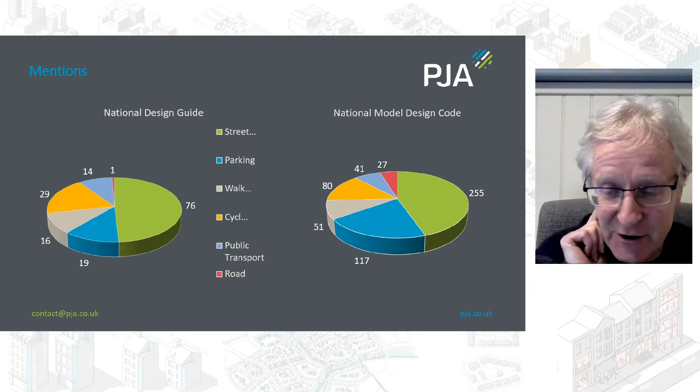One of the things I did was have a look at the mentions of the word street in the National Design Guide to begin with, and we've got 76 in there, and that comes ahead of parking and walking or cycling and public transport. Then when we come to the Model Design Code, we're up to a whopping 255 mentions of the word street, and I've actually took out the 256th, which is the address of MHCLG. So yeah, it's clearly streets are central. It's all about the streets, which is great to see.

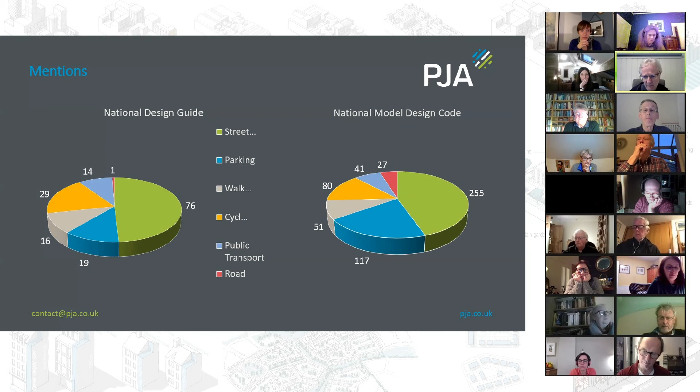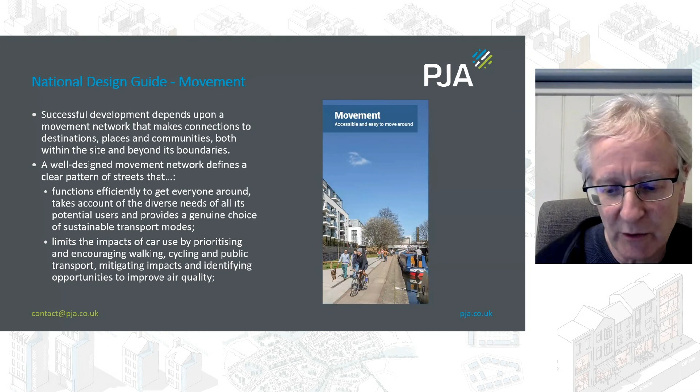Going back to where we were with the National Design Guide on movement, I think there's some good stuff in here. Connections to destinations within the site and beyond its boundaries, clear pattern of streets, but it's all rather wordy, and I think that's perhaps one of the charges that have been levelled at the National Design Guide, and I think the Model Design Code is putting a bit of meat and a bit of certainty behind that.

So we've got the Model Design Code and we've got the guidance notes, where we look for some key information. Obviously it's still fairly high level, and when it comes to streets, the guidance notes and the Model Design Code refer to Manual for Streets, and we know that we are going to get a new Manual for Streets, which is going to bring together Manual for Streets 1 and 2 later this year or perhaps early next year. And the two are kind of informing each other. So the thoughts in here about typologies and how it all fits together, I'm sure will be reflected, and I'm on the project board for that. I'm not involved in the writing of it this time, but I'm on the project board and been having conversations with the WSP led team with Andy Cameron and others, ITP, that are producing it, and I know they're watching very carefully how this all comes down.

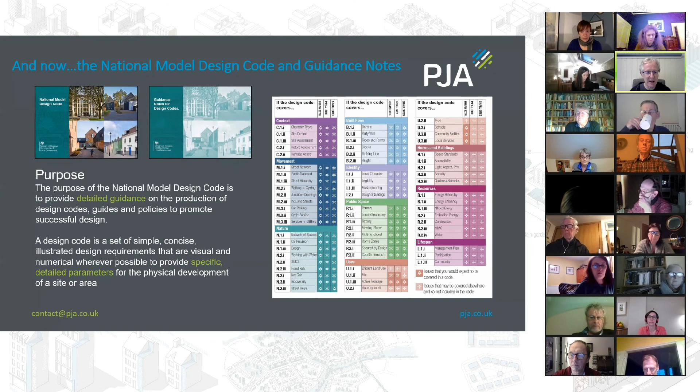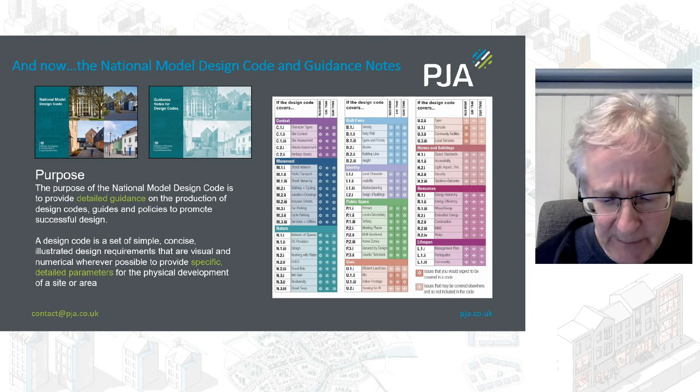So it's words like detailed guidance and specific detailed parameters that give me a bit of confidence that we're getting somewhere, because one of the charges against the original Manual for Streets is that it didn't quite hit the spot. I mean, there was some good stuff in it, I would say that, wouldn't I? And I think it did move things on, but it didn't quite have the impact that it should have done.

I remember it was Tim - many of you will know Tim was part of the drafting team - and I remember him quite distinctly saying we should have as few numbers as possible. When we give people numbers, it just stops them thinking. Let's take it away and make engineers think. But of course, the culture of engineers is pass fail, and understandably so, because they are held liable so often. So engineers do need some certainty, and I remember getting very cross with a highway authority DC officer who said, 'Can't work to Manual for Streets, it's too fluffy.' But when I came away thinking, well, she has a point actually, and if it's not working for her, then it's not working. So I think this is a chance for a bit of a reset.

Manual for Streets said a lot about hierarchies and this idea of a dual hierarchy of movement and place. And when I first read or saw that diagram in the model design code, street hierarchy, it was purely about movement. I thought, oh gosh, are we sort of going backwards here?

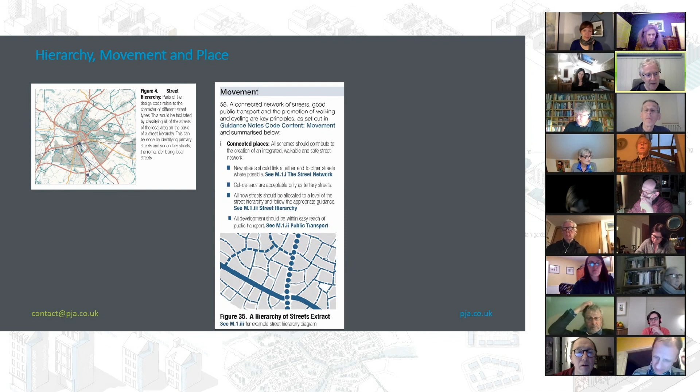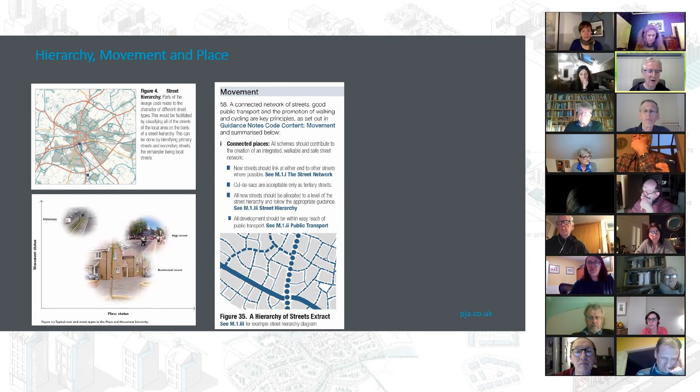And it talked about the hierarchy following those movement strategies. And we seem to have lost this diagram that was in Manual for Streets and Manual for Streets 2, led by the work of Peter Jones, that talked about place status alongside movement status, giving this sort of dual hierarchy to streets.

But actually, I think the way it's been handled still works, because there are some good words in here. Different streets play different roles depending on movement, but then it talks about built form and the uses around the design of the street space itself. And street types include multifunctional streets, which all have different place and movement functions. So I think the idea of streets having place and movement functions is in there, we just don't see it in this sort of two-dimensional hierarchy.

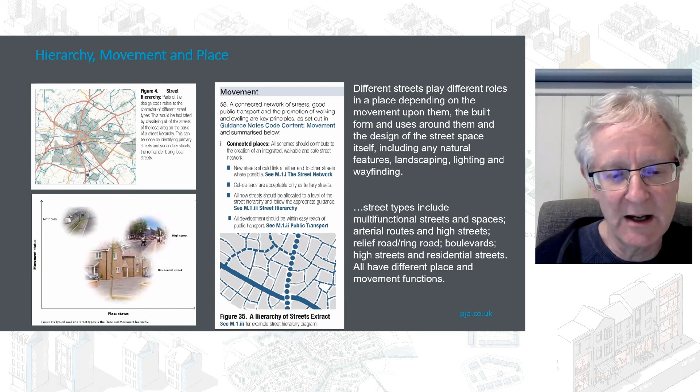And I know there are some people like Colin Davis who've argued passionately that you can't put place on a graph like this, and it doesn't work. Place is too complicated, too nebulous to be put on that simple linear scale. So maybe there's something in that.

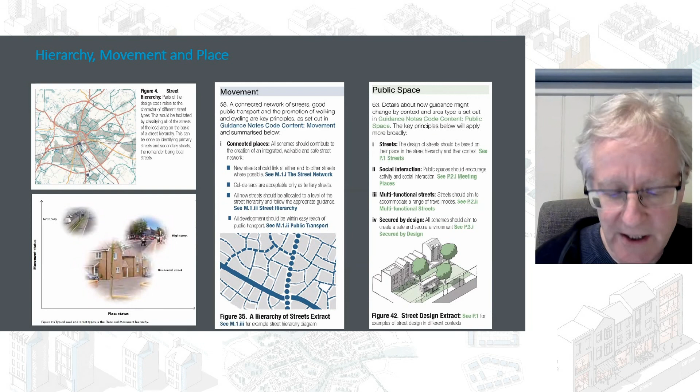And so what we actually get is all of those kind of place functions of streets talked about in the public space section, not in the movement section. I looked at that and thought, actually that kind of works, and that's where you find the more detail about how we design these kind of linear spaces, I suppose, that we can think of them as.

Connectivity, I like the things he talks about connectivity, and I like this simple rule, which I hope will work when developers test it: each street has more than one connection to another street. I think that's pretty good, really.

And it talks about street types and within the typology says we should only have cul-de-sacs at the tertiary level of street type. So that's kind of interesting.

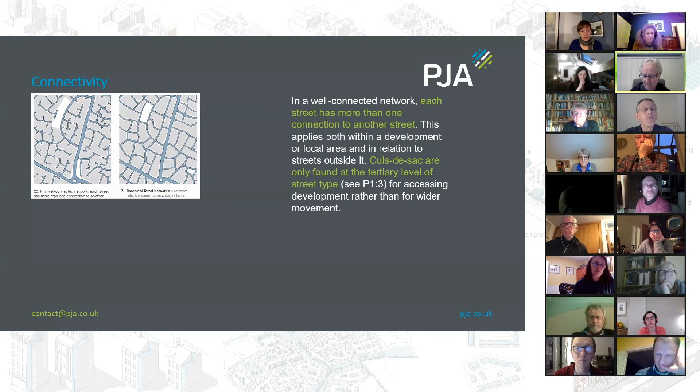And I also like what he says about filtering, filtered permeability. This image is from Waltham Forest, which has been held up as a really good exemplar of filtered permeability within a grid network. It's positive about that, and talks about how permeability for different users can be controlled by measures within the street space to prevent through movement. So I like that.

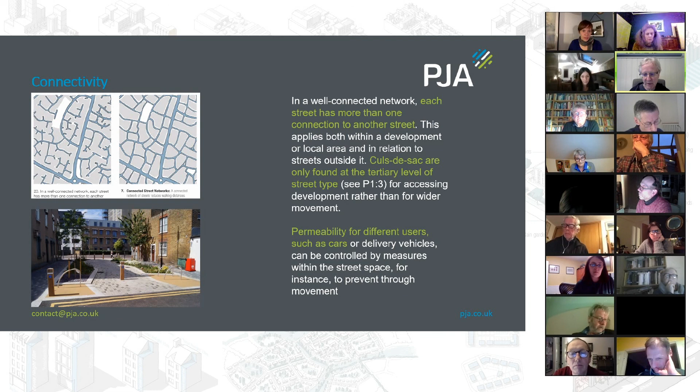I think when Manual for Streets came out, I know there were many active travel campaigners who think it's too pro permeability for motor traffic, and maybe this is redressing the balance of that. So we can have connectivity for all modes, but more connectivity for the most benign modes, the most sustainable modes, and that's a really interesting development.

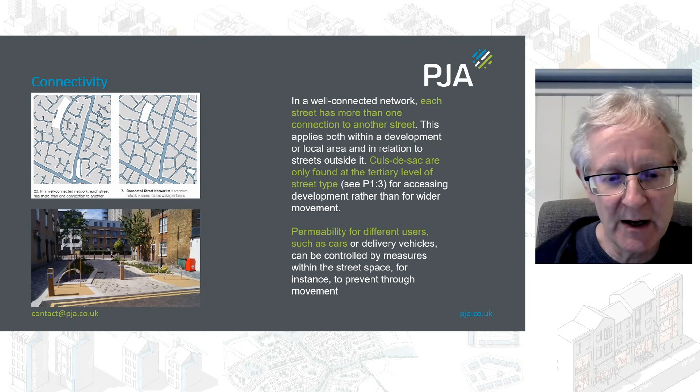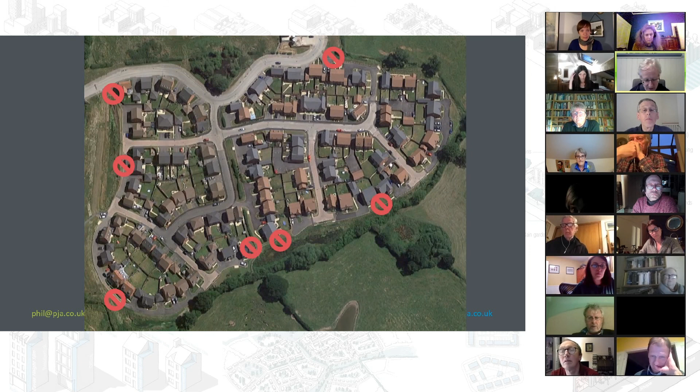To get away from this sort of pod development with private drives that design out connectivity and create these executive homes where people who live there suggest they prize the fact that nobody else can walk past their house - what Sue McGlynn calls kinetophobia, the fear of movement.

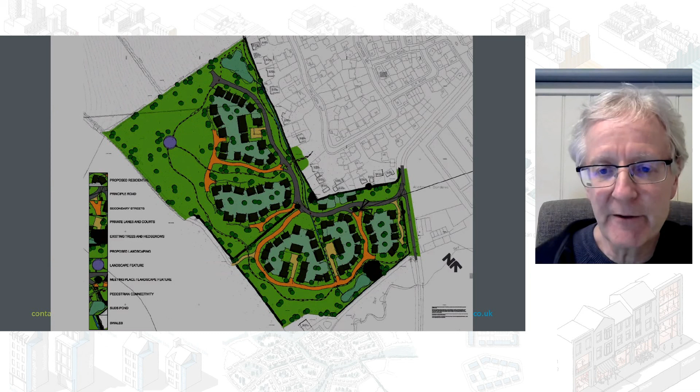So hopefully this gets away from that. But will it get away from this? This is the other problem of connectivity, which is driven by land boundaries. Here we have a site that's not particularly well connected internally, but it's extremely poorly connected externally - one way in and one way out - and it's another skin of the onion surrounded by cul-de-sacs.

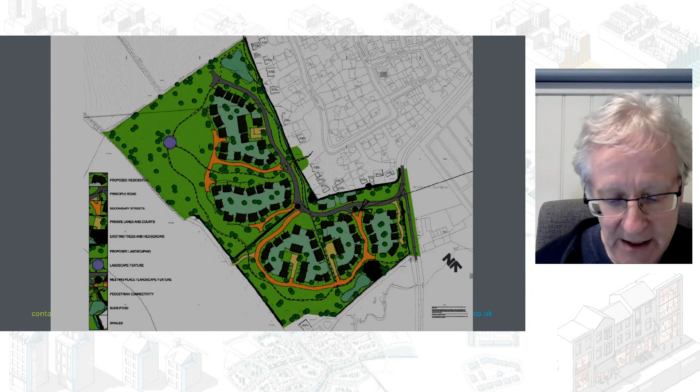If we're going to drive connectivity beyond the site boundary, that's going to take some really robust policy or decisions by planning authorities, because that's often constrained by land ownership. Is a planning authority really going to refuse consent when there is not more than one means of access to a site? That's going to be very interesting to see - is it going to challenge that?

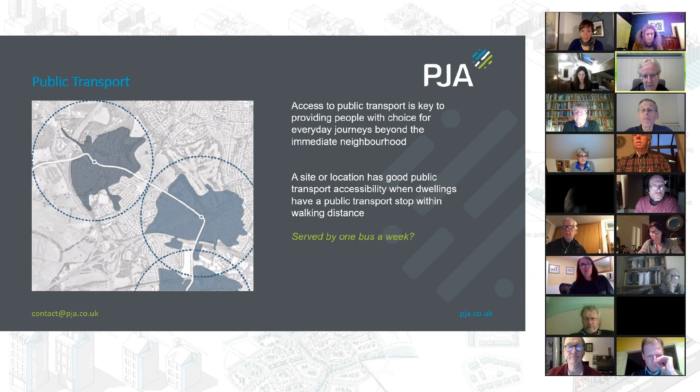I think public transport - there's some good words in here about public transport being key to providing people with choice in everyday journeys. It says a site or location has good public transport accessibility when dwellings have a public transport stop within walking distance. And I thought about that - actually, I'm not sure that's enough. You could achieve that if your public transport stop had one bus a week. So I question some of the stuff in here about public transport.

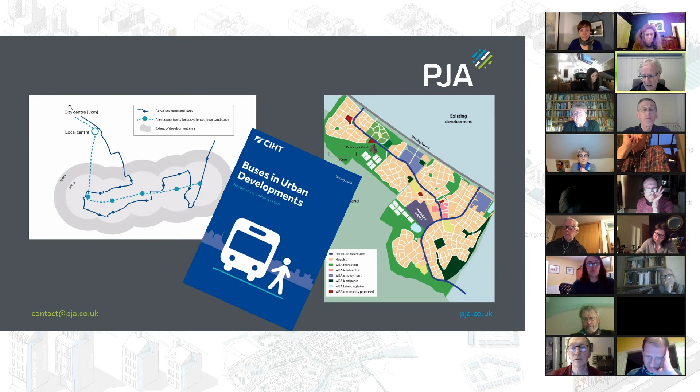And there are other good references we could refer to - the work of Tim Farrow with CIHT, some really good practical guidance on how we plan and design for buses and what good public transport access looks like. I think there are references there, so I think that little bit of the National Model Design Code probably needs a bit of beefing up.

Active travel is dealt with very well, and it's interesting that within the guidance it's actually a tier above public transport. It's raised up to the level of connectivity, which shows the importance of that for health and well-being. Small details, like continuous footways shown in the diagram, slipping in there - I think that's really nice.

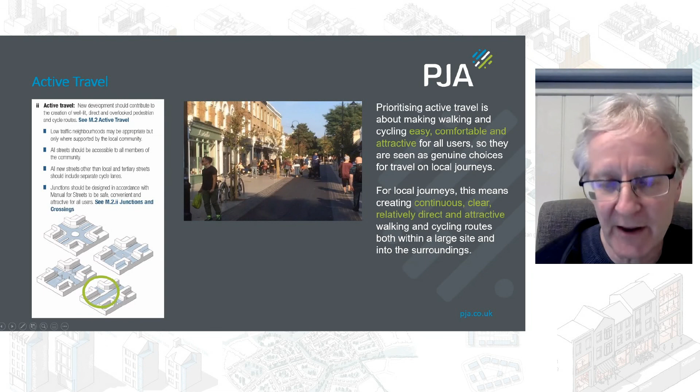Again, this is Waltham Forest. It's good to see local low traffic neighbourhoods cited. They're supported in Local Transport Note 1/20, which has just come out, and Gear Change, the government's cycling and walking plan, is very positive about low traffic neighbourhoods. So it's good to see that in the National Model Design Code. But it says maybe appropriate only where supported by the local community - that's a bit weak-willed. Is that a kind of reaction to some of the unnecessarily negative press we've seen around low traffic neighbourhoods?

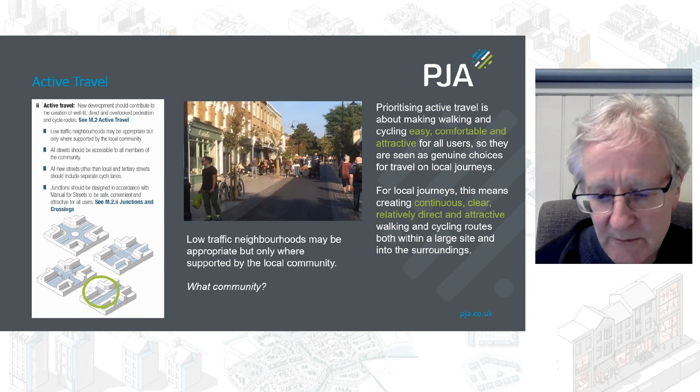When we say that, what community, if this is new build, what community can we ask about that? I think we could be a little bit stronger, because Active Travel England is going to be a player here. It's not mentioned, probably quite rightly. But for those not aware, Department for Transport is working now to work out what Active Travel England is going to do. One of its functions will be a statutory consultee within the planning system, so we'll have something to say about that.

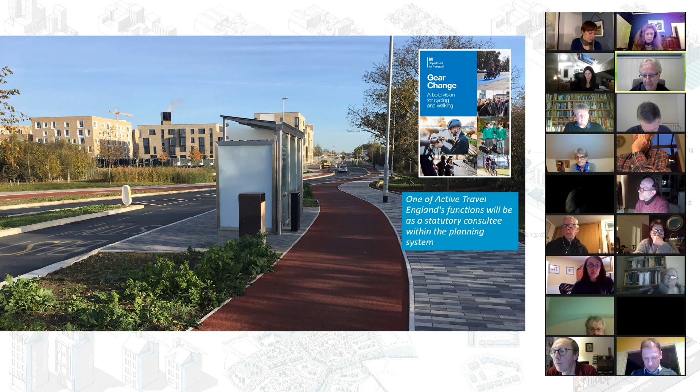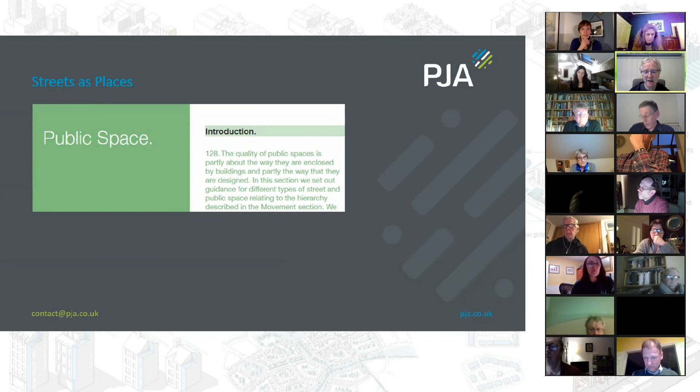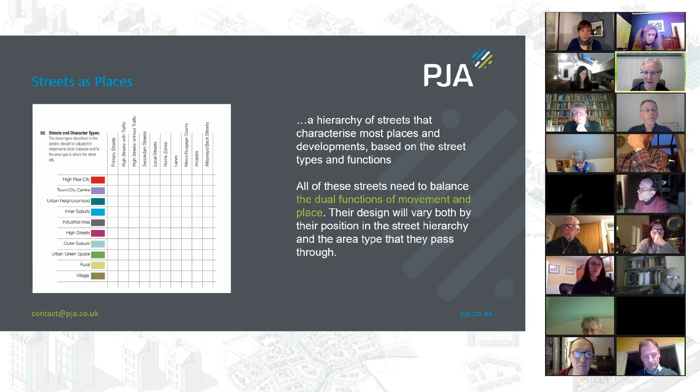Streets as places - we find that in the public space section of the design code. Here we talk about different types of street and public space, referring back to the hierarchies. That's all good, and we see different typologies of streets. These are exemplars, and they may not be exhaustive, and then where we might see them - that's all going to come in the codes. They talk about the dual functions of movement and place. So it's in there, just not represented in quite the same way as Manual for Streets.

Then we get the typologies, and I like that. There's some details I need to look at - are they right? It'll be interesting to see how, when Manual for Streets takes this forward, there might need to be a bit of iteration here coming back. I like the little pop-ups that work in the PDFs that tell you a bit more about it, and we get these isometrics that show the relationship between the buildings and the movement on the streets and how that all works. So I think they're very good.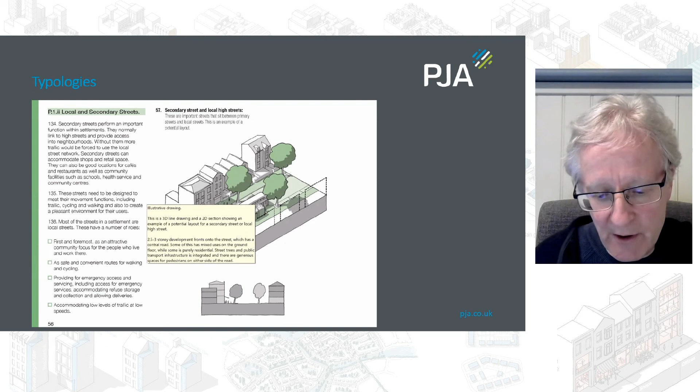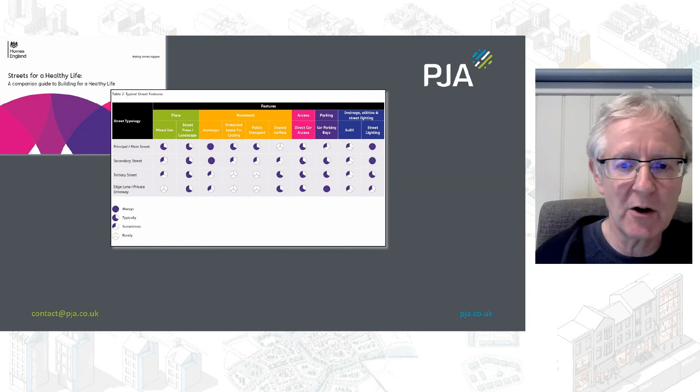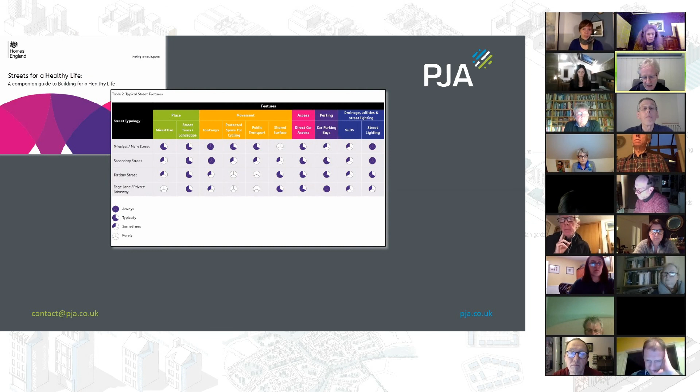It's interesting - we've been doing some work recently for Homes England as a kind of stopgap, possibly before Manual for Streets comes along, and we're going to talk about this at their design day in April. Here again we talk about typologies, in the context of big urban extensions: principal main street, secondary street, tertiary streets, and then edge lanes and private driveways - what features might we see, categorising them with place, movement, access, parking, drainage, which are the street functions in Manual for Streets. So there's some link up there with the thinking we've been doing, which is good.

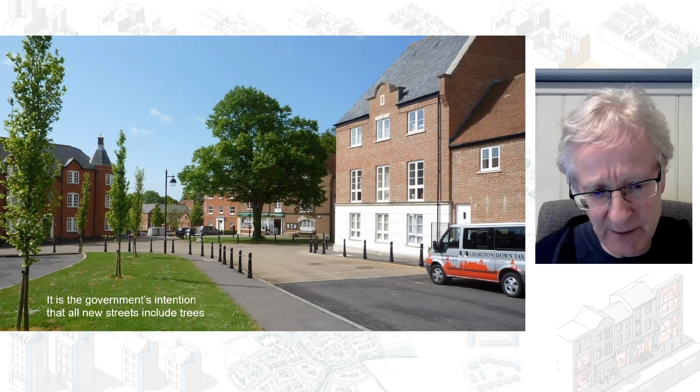Then the images about what green looks like for those different typologies, so this all seems to be going in the same direction. And then, of course, there's this intention that all new streets are going to include trees. That seems a little simplistic to me, and I'd be interested to see what others think. Trees are great, we all love trees, but is it right that every street should have trees in it? I don't know, but it is in there, and at the moment very few new streets have trees, and when they do go in at planning stage, they tend to disappear. Amy Burbage of Homes England did a great presentation about the disappearing trees between planning and implementation. So even if we get some street trees in, that's great.

So that's my final slide. I think the guidance is good, is well structured. I think it builds on and reflects Manual for Streets principles. It's got a slightly different take on how movement and place is talked about, but I think it works. I think public transport needs a bit more detail, but I think active travel is handled well. I'm sure others will have detailed comments, but for me, I think it's a good document, and I wish it well.

Thank you very much, Phil. That was a very good overview - very positive and encouraging, which is great to hear.